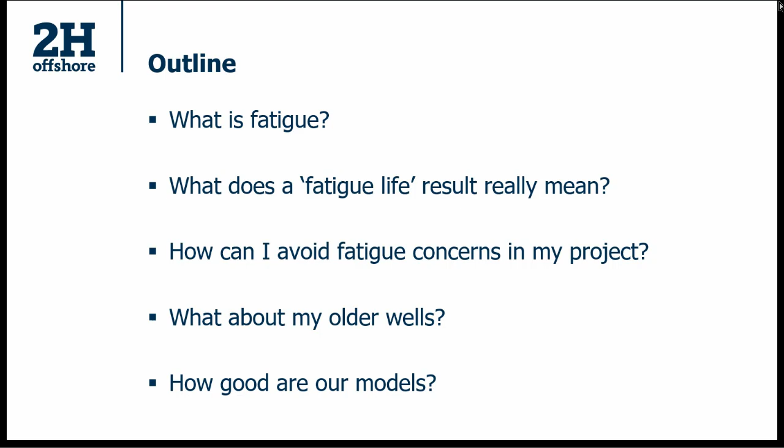And then finally, a question that we often get is, how good are your models? How close to reality does your analysis actually get?

So starting off then, what is fatigue? Probably the classic example of this is an experiment that you might have done with your kids during lockdown, or one that you did back at school, where you take a paper clip and bend it backwards and forwards until it snaps. What you're doing to that paper clip is exposing it to cyclic loading. Now, you tend to bend it quite significantly in the paperclip example, but you don't have to get a fatigue issue. Often for subsea wellheads, we're operating entirely within the elastic regime.

But there are really 3 different phases to fatigue. First of all, the initiation phase, which is where you bend it enough, at a certain threshold, to initiate a crack somewhere on the surface of the material. Then, as you continue to load it, you propagate that crack through the thickness until it reaches a threshold size where the stress intensity at the crack tip is sufficient to overcome the toughness of the material, and you end up with a fast fracture, a brittle failure.

You see on the picture to the left-hand side here, where you've got the initiation site down at the bottom of the sample, the smooth surface associated with the propagation of the crack to that threshold, and then the rough surface associated with the fast fracture and the brittle failure.

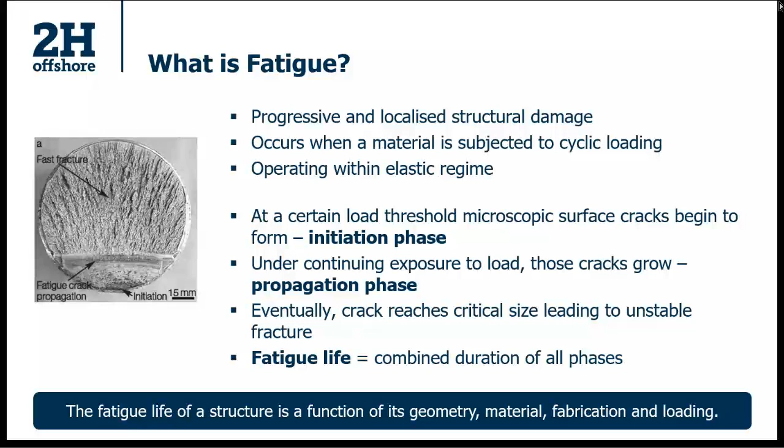But fatigue life really is the combined duration of the material and the loading in all of those phases. For any structure, it's a function of the structure's geometry, its material, the fabrication techniques used to make it, and the loading that it is subjected to, and we'll pick up on each of these themes as we go

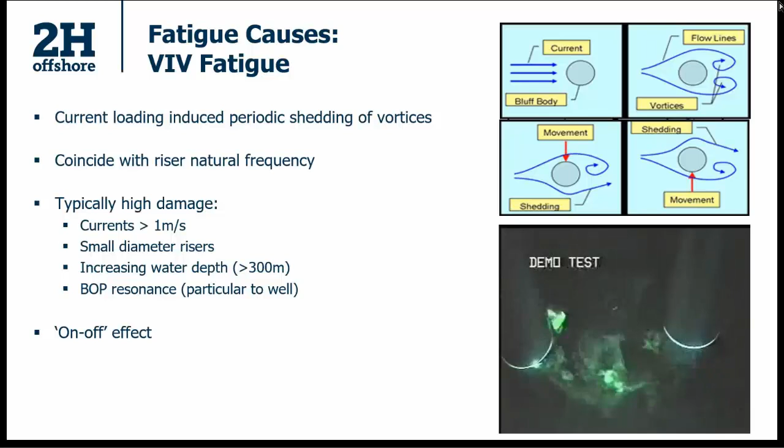through the presentation. In the subsea wellhead world, there are really two fatigue mechanisms that we worry about, environmentally driven. The first one is current-driven fatigue, which is this vortex-induced vibration, or VIV fatigue, and the other one is wave-induced fatigue that I'll talk about on the next slide.

For VIV, when you place a cylindrical body into a current flow, you'll tend to get vortices shed on the leeward side of that pipe, and you sort of see that in the diagram up towards the top left of the slide. Those vortices tend to be shed from one side of the pipe and then the other in an alternating manner. That creates a pressure wave that moves the pipe backwards and forwards and then causes your cyclic stresses and your

fatigue loading. Now that's not too much of a problem typically until the frequency with which those vortices are being shed lines up with the natural frequency of the riser pipe, and then you get resonance occurring. That's when your motions become amplified and so do your damage rates.

So typically for VIV, we tend to be more worried about it where we have faster currents, and it seems obvious. About a 1 meter per second, 2 knot threshold is key for that. Smaller diameter risers that are easier to excite, and also for deeper wells. So increasing water depth, greater than about 300 meters or so is the threshold.

And the deeper water is more of a problem because we have a greater length of riser that's exposed to the current. We have more region over which power can be driven into the system through this excitation effect.

But also we get high damage where in the wellhead, where the riser frequency tends to line up with the BOP frequency. Because if that resonant effect then goes on to excite the subsea equipment, whatever's sitting on top of the wellhead, then you'll get significant damage in your wellhead equipment.

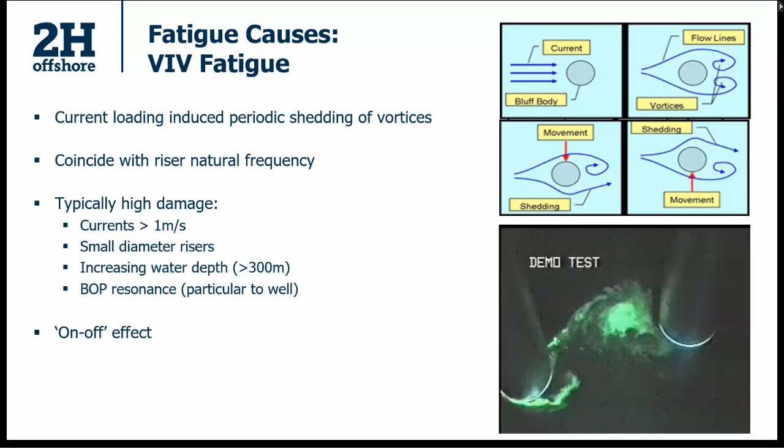But the key takeaway is that VIV is an on-off effect. If you break that resonance behavior, then your fatigue damage rates will drop way off. That's not true with wave fatigue, which is constantly being accumulated at some rate or other.

You've got the wave action on the vessel, on the sea surface, moving that around, and some of those motions get transferred down through the riser. But then you've also got the direct action of the wave on the riser itself as well, through drag loading.

So the opposite of VIV here is that we're more concerned about wave fatigue in shallow water depth, so below that kind of 300 meter threshold. And the reason for that is that the wave is occurring at the top of the system, and the longer you make your riser, the smaller the percentage of it that's being excited by the wave, and the more the percentage of it that's helping to damp out those motions before they get transferred down to the wellhead.

We're also more worried about wave fatigue for the most commonly occurring waves. That kind of makes sense. But also those waves are around about the 5 to 7 peak period second regime, which is where we start to get into that resonance behavior in these kind of water depths as well.

Again, both resonance of the riser, but also the BOP and the subsea equipment. And as I said, constantly being accumulated. Your wave height will rise and fall, as will your damage rate, but you'll always be accumulating something.

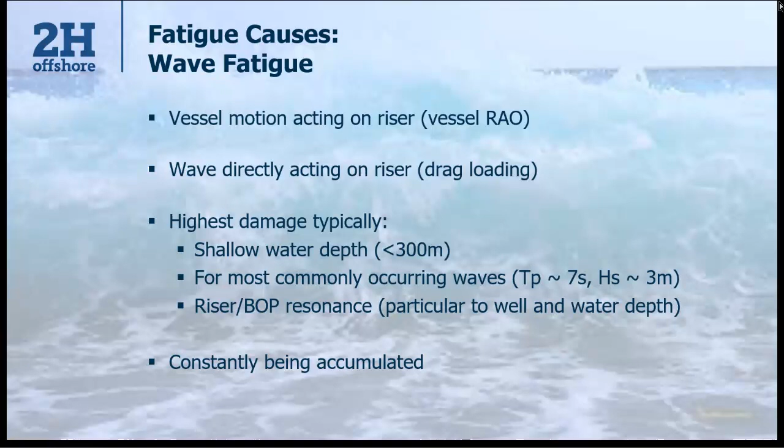But for both mechanisms, the technique that we use to assess them is pretty similar, and we call it the SN fatigue assessment, where S is stress and N is number of cycles. I've laid out 7 different steps to that process on this slide, but really the first 2 are done for us, and we take those from the design codes.

This is where people have tested samples of different materials, different fabrication techniques, different welds, etc. They've tested them at different stress levels and seen how many cycles of those stresses it would take to fail the sample, and that gives us our S stress, N number of cycles relationship.

For any given project, we usually start at step 3, which is generating our stress time traces for the loads we expect in our system during the service life - that's the global analysis step. After we have those stress time traces, we have to do something with them - that's the remainder of the steps, what we call post-processing: quantifying the number of stress cycles of different magnitude that exist in that time trace, then comparing those numbers of cycles to the number of allowable cycles that we extract from the SN curve.

Finally, we add up all those ratios to get our damage, and the last step, step 7, is applying a safety factor to account for the variability. That's where we tend to start losing people in terms of the conservatism that's inherent in the assessment. I'll go through that in some detail in a bit.

But the approach itself has been around a very long time now. It's well recognized in the industry, and it takes different pieces from each of these design codes that I've put down here and some others. These will pop up as we go through the rest of the presentation.

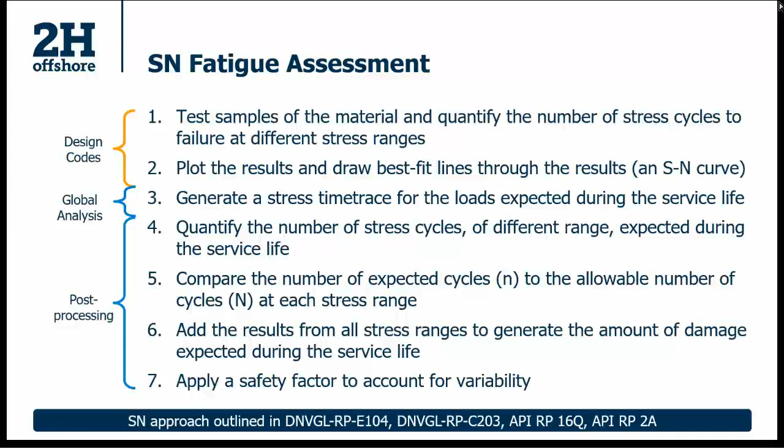As I said, we start on any given project with step 3, which is global modeling. We call it global modeling because we're doing exactly that - we're modeling the whole system in one go.

We typically start at a point that's about 50 meters or so below the mudline. That's deep enough for all the forces and bending moments and everything exciting to have dissipated in the soil above that point. Then we model the conductor up to the wellhead.

We have the subsea equipment, the BOP stack, the LMRP, etc. Go up through the riser joints, telescopic joint, up to the drill floor of the vessel, whatever's attached to our well.

That allows us to have all of the behavior connected together in one model, and we can expose the whole system to the environmental loads. So we get the action of the wave on the vessel, as well as the direct action of the wave on the riser, for instance, all captured in one model, and we can extract the structural response of each individual component in that system, again from a single model.

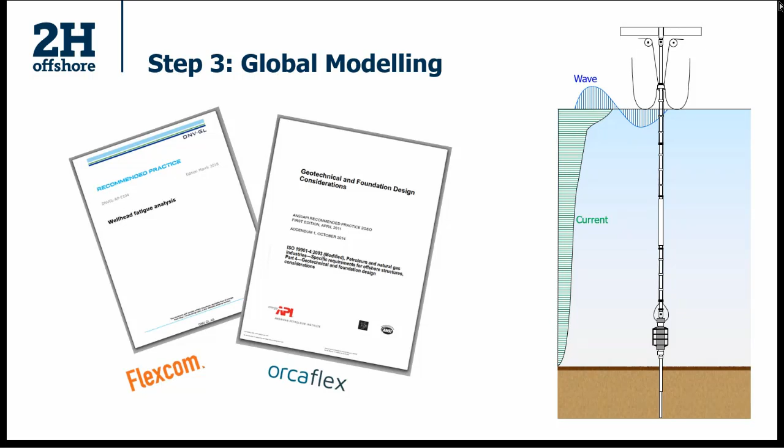It's essential to use appropriate information, and that's important. By that I mean site-specific, so it belongs to the location where you're actually going to be performing the operations, but also appropriate in terms of the time of year and the season that you're going to be doing those operations in. So if you're going to be doing them in the summer, then you want to take the benefit of having summer weather, so the diagram should represent that.

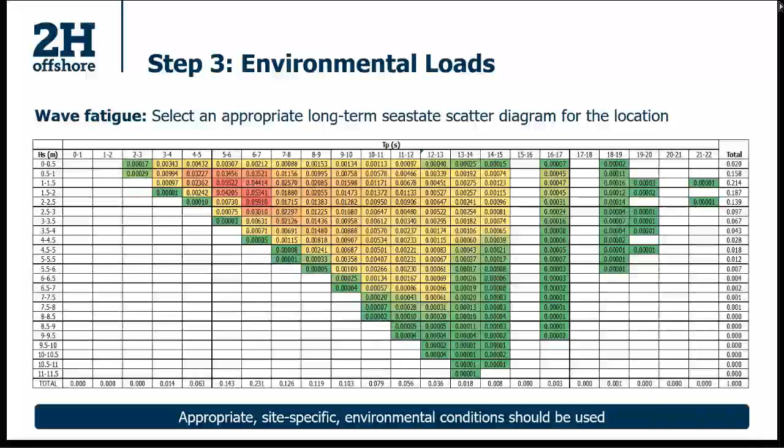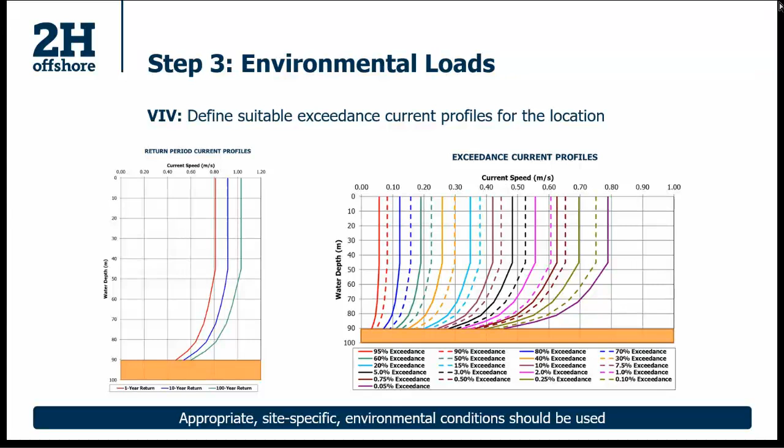So once we've built the model, we've loaded it with the environmental conditions, we've agreed they're appropriate. Now we need to convert the outputs into our stress cycles. And there's different steps to that.

The first one is to extract time traces of bending moment and tension at each node of interest. We can extract them from any point of the system because we're using this global modeling approach.

We then convert those outputs to stress time traces, considering the geometry of each individual component and beam theory, and also the appropriate stress concentration factors for each component. By that I mean the ratio between the peak stress at a location that might be more heavily stressed than average, and the average stress across the wall thickness. This applies for things like connectors, where you might have a peak stress in a thread, for example, relative to the average stress across the main part of the wall.

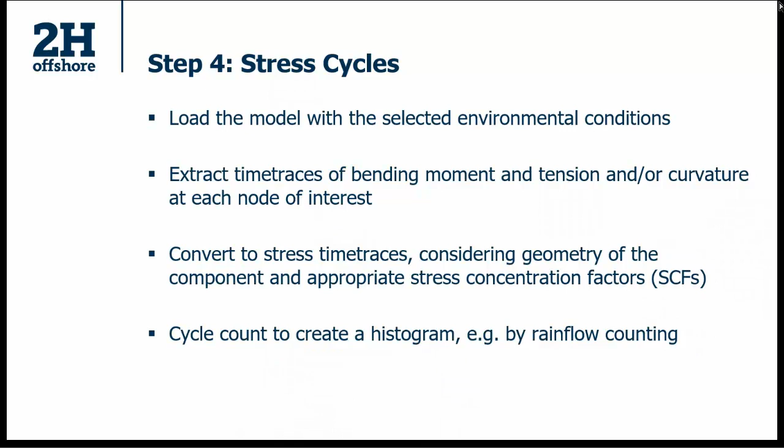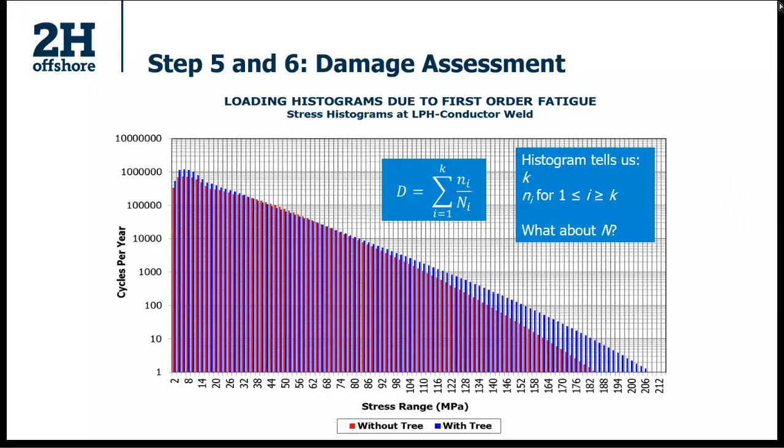And that information comes from the SN curve. The SN curves, I said that they come from design codes, but it's worth spending a moment or two just examining how they're actually formed.

The way that they are formed is that you take the sample of the material that you're interested in, whether it be a base metal or a welded detail, or whatever it is, and you expose that sample to a bending moment or a known stress range. You bend it backwards and forwards, just like the paperclip that I started with, until that sample breaks.

You count the number of cycles that it took to break that sample, and you mark it on your plot. Do that again with a second sample and a third, until you've got enough information to understand the distribution of failure at that particular stress cycle. Then you increase the stress on the component, take another sample, repeat the test and get a value of n, another sample, and again until you've got enough information to build up that distribution.

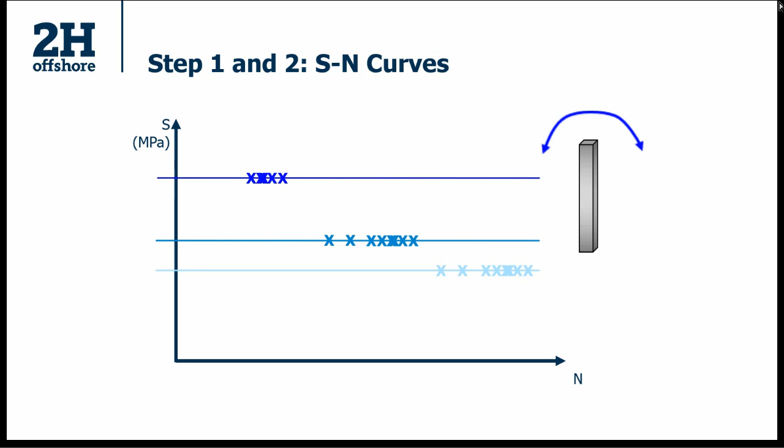And you keep doing that at enough different stress levels until you've got sufficient information to draw a best fit mean curve across the entire SN domain. Then the final step to convert that to a design tool is to pick a design curve which is usually placed 2 standard deviations below the mean, or around about a failure probability rate of 2.3%, 23 samples-ish in 1,000 samples that you've been testing.

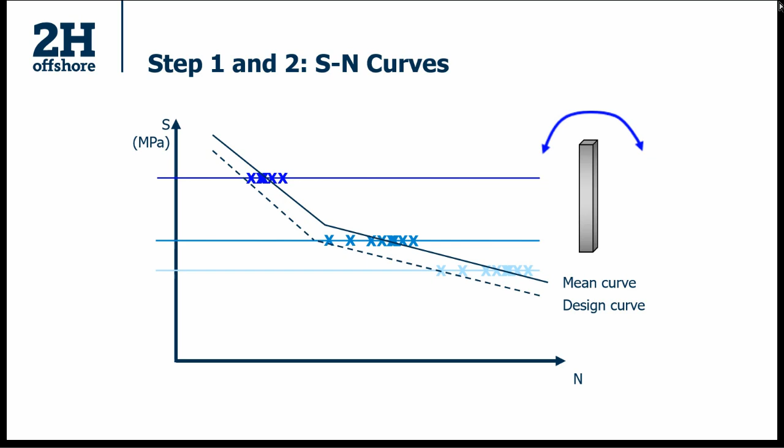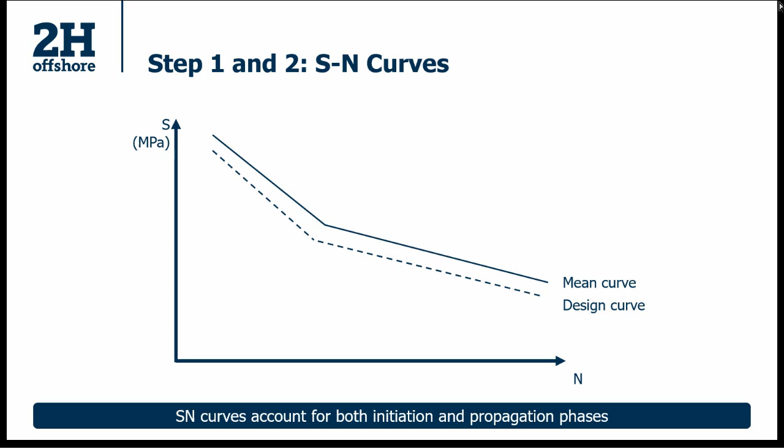One of the key things about SN curves is that because you're taking the samples through to failure, they account for both initiation and propagation phases of fatigue life. You'll have different ratios of those phases for different types of sample, but you're encapsulating everything in one curve.

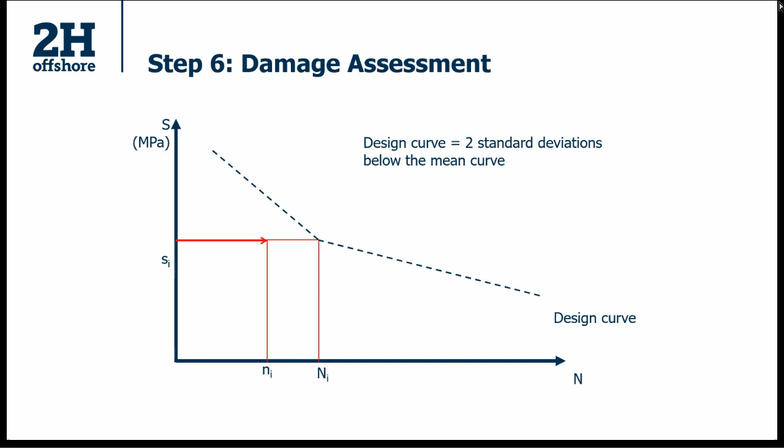So we have our design curve, which is 2 standard deviations below the mean. From our histogram, we extract for each stress range level, S, the number of cycles that we expect, little n, and we also calculate from the SN curve the number of allowable cycles at that same stress range, which is our big N. Then we take each of those little n over big N ratios and add them all up to calculate our fatigue damage.

And for subsea structures, the SN curves are available in DNVGL-RP-C203, and that's usually our primary reference for this information.

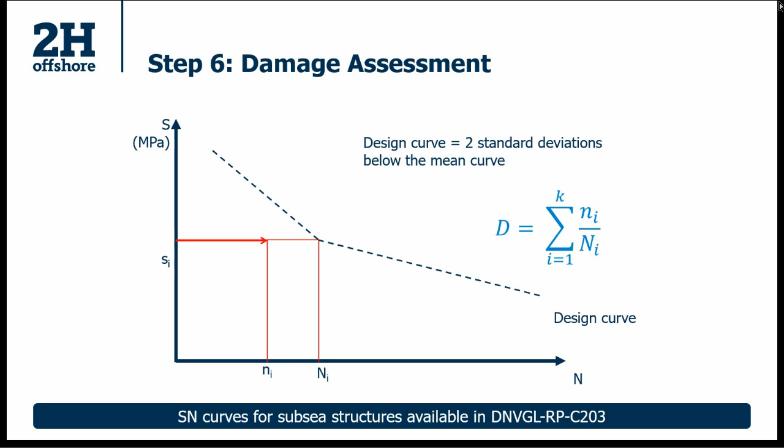Then the final step in this process, step 7, is the application of that safety factor. And really there are 3 main reasons for doing this.

First of all, to account for variability in the loading. For predictive analysis, where you're planning a forward-looking operation, you have to use an assumption about your environmental data, an average essentially. You might narrow that average down to summer weather or winter weather, but the actual summer you go out there to do it might be more benign or more onerous than the average conditions. So there's going to be some variability there.

There's also some uncertainties in the design data. Perhaps your real-life conductor stick-up is slightly different from your plan and design, for example. So you need to account for that as well.

But probably the most important of these 3 aspects is to apply a safety factor to ensure the probability of failure associated with the fatigue life result is appropriate for the activity. Because we're dealing with drilling hydrocarbon wells, where we've got environmental risk, human risk, and everything else associated with that, normally those activities are classed as high safety class in DNVGL's ST-F201 world, and the acceptable failure probability associated with that safety class is of the order of 10 to the minus 5. They say that if you apply a factor of safety of 10, you should be operating somewhere down at that level in terms of failure probabilities.

If you have a lower safety class operation, you can accept a higher failure probability, up to 10 to the minus 3, for example, and then you can apply a lower factor of safety, like 3.

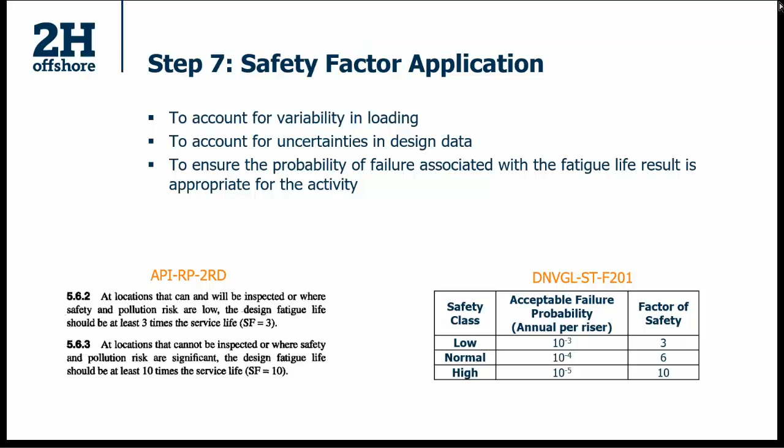Now in API's world, they have a slightly different logic, but they end up in a similar place. What they do is say that if you can and you are actually going to inspect your components during the service life, then you can use a fatigue factor of safety of 3. But if you can't or won't inspect during the service life, then you must use 10. So the numbers are the same, but the logic is slightly different.

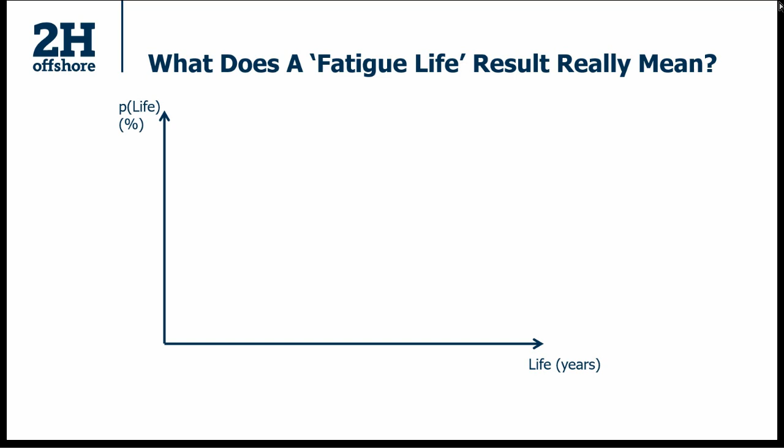So we do all that and we get a fatigue life result out. But what does that fatigue life result actually mean? On this plot, I've got increasing life along the x-axis, and probability of failure at that life up the y-axis. The first thing we can mark on here is a known variable, our service life - that's the time the drilling riser will actually be connected to the wellhead.

Now we're then going to pick an appropriate factor of safety - let's say it's that 10. And we're going to multiply our service life by that factor of safety to get our design life. The design life is essentially the target for our fatigue analysis. So before we apply a safety factor, what raw number do we need to get out of the fatigue assessment to actually meet our fatigue requirement?

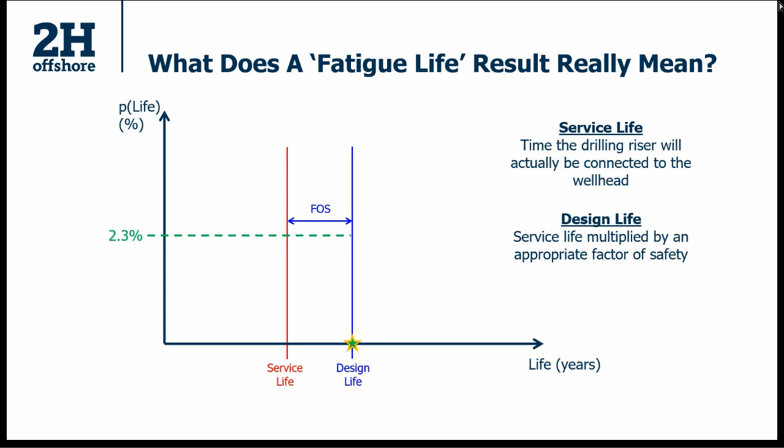That's the design life number here. So let's assume we do that and get a fatigue result from the analysis that's exactly equal to our design life. What that really means is that at that point in time, we've got around a 2.3% chance of failure. Now there's a massive assumption that goes into this, which is that the loading and the analysis is a perfect representation of reality, and that 2.3% just links back to the selection of the design curve from the SN world, from the SN testing, and the fact that we're 2 standard deviations below the mean.

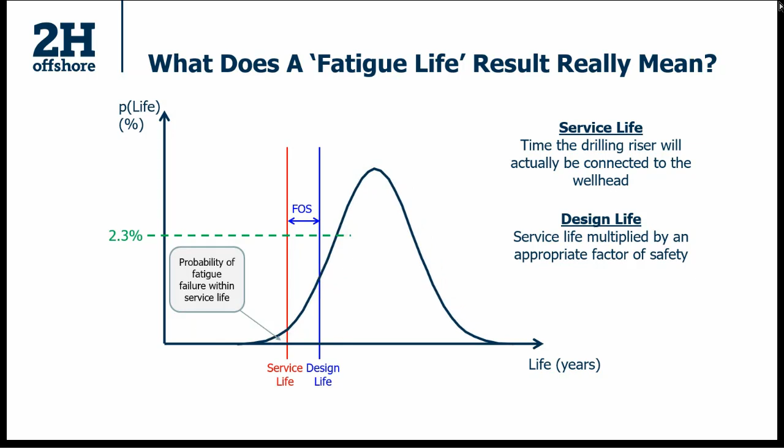As I said before, there's a lot of variability around this result, so really that point just represents one point on a big distribution. And by introducing that safety factor, what we're doing is controlling the amount of that curve that's below, or a time period that's shorter than our service life. The area under that curve to the left of the service life is the probability of fatigue failure within the service life. So if we've picked our factor of safety correctly and met our design fatigue life target, then that is an acceptable area. If you pick a lower factor of safety, what you're essentially doing is accepting a shift of that curve to the left and a greater probability of fatigue failure within the service life.

So the fatigue life then is the time with the drilling riser connected before the allowable probability of a fatigue failure is exceeded, and that's kind of the definition that I use.

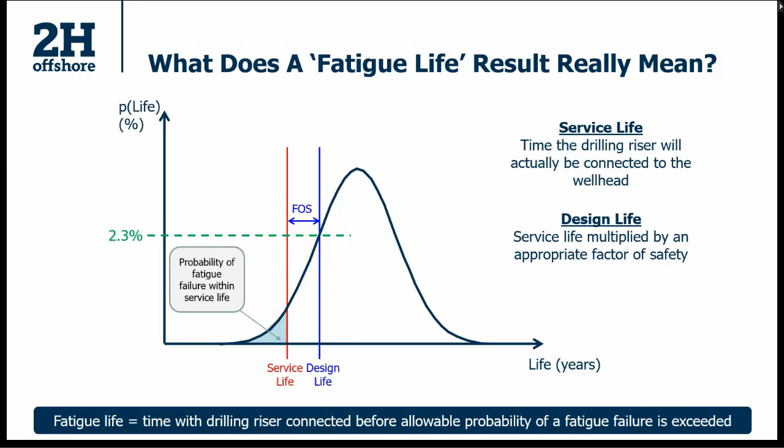Alright, so that's focused mostly on analysis so far. Let's shift gears a little bit and look at design and avoiding fatigue issues.

For new drill wells, fatigue issues can generally be designed out of the project. That might be through picking equipment of a sensible or suitable size, like your conductor sizing or your surface casing sizing, or it might be picking fatigue-resistant equipment, like certain connector types or wellheads, or it might be placing that equipment somewhere it's not exposed to peak loading, reducing fatigue damage rates.

The final thing you can do here is pick a vessel with favorable dynamics, one that's not going to exacerbate any resonant effect, and that will have its peak motions in a period outside the main wave occurrences, for example.

Now, for intervention operations on older wells, you can pick a vessel again, but apart from that, there's not really a lot you can do with the design because the well's already in the ground.

So here, this is probably where you're going to need refined analytical approaches. It may be where you need to look at risk assessing reduced safety factors, particularly for abandonment operations or late life operations. Or you may need other mitigation strategies such as structural monitoring or structural reinforcement. We've got some slides on those towards the end.

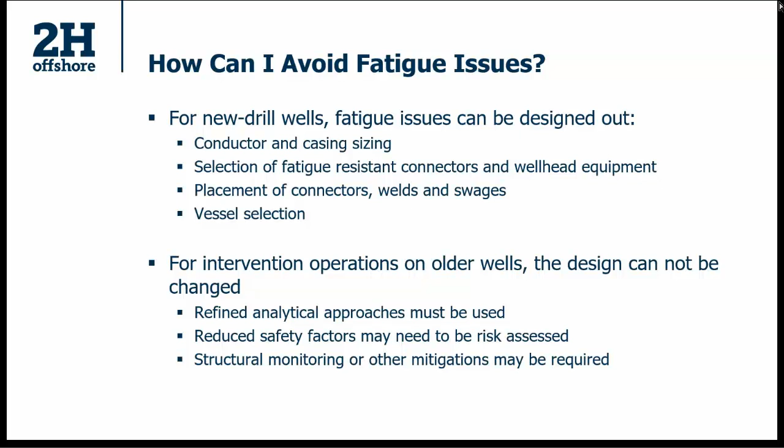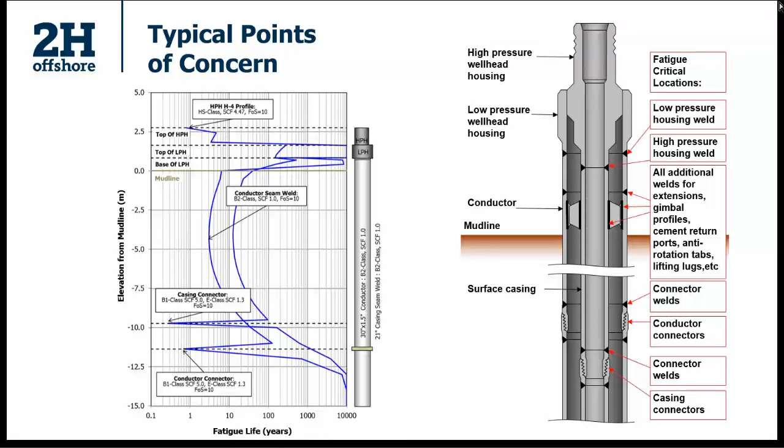Those spikes are caused by something interesting in the fatigue world: either a geometric feature, such as a thread, gouge or notch associated with the connector that gives a high SCF because of a stress raiser, or a weld that, through the manufacturing process, has a higher probability of an existing flaw compared to the base metal. The first increases our stresses through the SCF. The second, the defect in the weld, reduces the number of cycles we can have because we've already got a defect of a certain size in the material, reducing the SN performance.

Some of the things you can do in design to improve fatigue resistance, we'll go through in the next few slides. This first one is looking at conductor size. For this particular example, it's a certain configuration in a certain location, so there is some variability.

We're comparing the fatigue response at two different welds in the system across four different load cases for different conductor sizes. We start with a 30-inch by 1.5 inch wall thickness conductor, load case 1, go up to 36-inch by 1.5 inch, load case 2, then continue to increase wall thickness and OD for load cases 3 and 4.

You'll see that increasing from 30-inch to 36-inch gives us about a 5 times improvement in our fatigue result, and we keep improving as we go bigger, although those improvements tend to level off. So that increase from 30 to 36 is the key one here, and that's one that many people use in the design of fatigue critical wells.

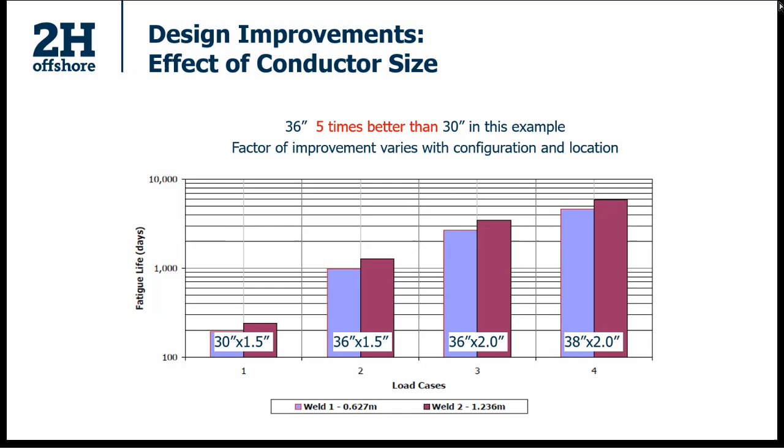Conductor stick-up is another one. As you increase your conductor stick-up, the height of your wellhead above the point where it's supported by the soil, you're essentially increasing the lever arm effect from your BOP and LMRP stack sitting on your well. Just like a flagpole, the longer you make it, the greater bending moment you'll have occurring in the wellhead at the soil itself.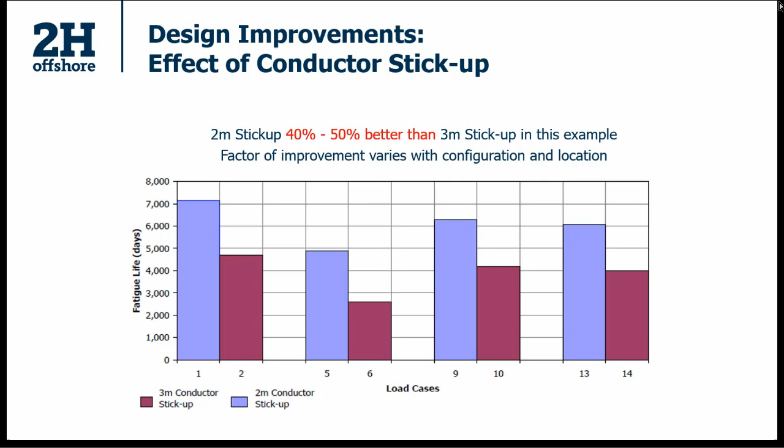Something else you can do is look at the hardware that you're using. For the wellhead, you'll generally pick it for its strength rating and for its internal pressure rating. But you may want to consider whether or not it has a rigid lockdown mechanism associated with it - a mechanism that keeps the high pressure housing in contact with the low pressure housing at all levels of load.

If you achieve that, then you're making sure that the bending moment you're putting into the wellhead is being resisted by both the conductor string and the surface casing string at all times. There's no lift-off effect, if you like.

But as well as the performance of the housing, you want to also make sure that the weld joining that housing to the adjacent pipe, and the design of the weld prep at the base of the housing, is sufficient to give you suitable amounts of fatigue resistance. There's no point having a fatigue resistant wellhead if the weld attaching it to the pipe doesn't have the same level of fatigue resistance. It's a similar story for the couplings.

And then the other thing you can do with any conductor type is extend the length of the extension joint below the wellhead. By doing that, you're going to push the connectors deeper into the soil and push them below the area of peak bending moment, as we've seen on the couple of fatigue life plots so far.

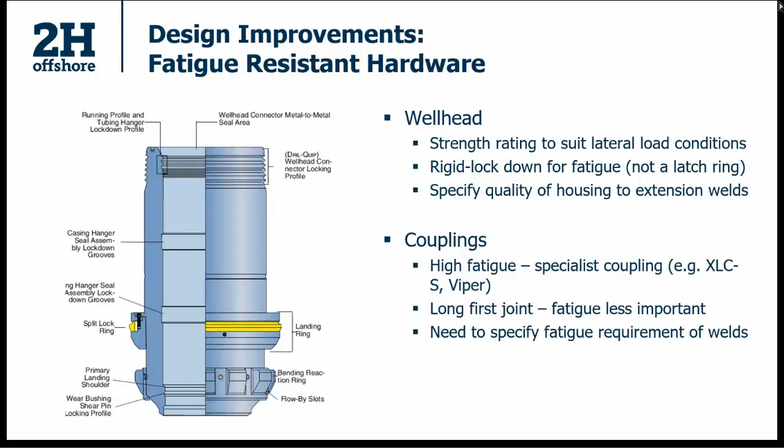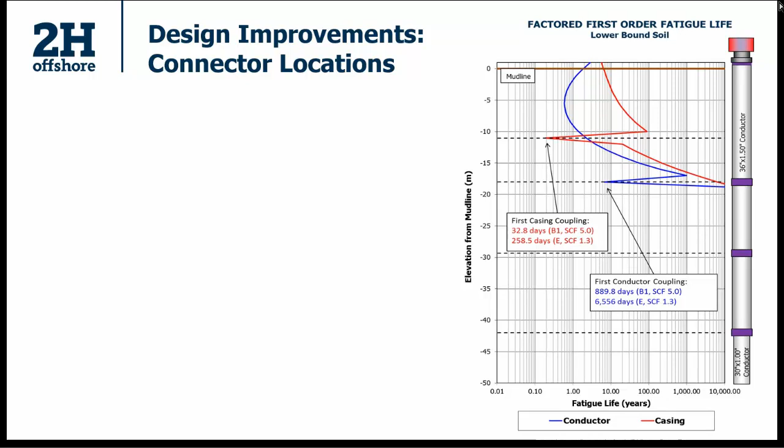If you do a mental exercise and move it up to where that red spike is, about 11 meters, which is where a traditional 40-foot joint would end, the tip of that blue spike would be off the chart to the left. So our fatigue life would be below the 0.01 year level, which obviously wouldn't be sufficient for our operation. This shows how critical the location of the connector can be in terms of your fatigue performance.

Finally, on design decisions, vessel selection. Now, I've said there's a recent trend to increase BOP size, but really it's been going on for quite a while now - partly driven by a push towards deeper water, partly driven by a push towards drilling wells at higher pressure.

But also that post-Macondo effect, almost a decade ago now, where additional rams started to be added to BOP stacks for well control reasons. That's good for safety, but not so good in terms of the loads we're putting into our wellheads. As you make that stack bigger and heavier, you're going to be increasing the load on the wellhead.

And then the other slightly more subtle effect is that as you increase its size, you're changing its resonance frequency and pushing it up to slightly higher periods. That's going to be more likely in the region of peak wave occurrences that we talked about before in those scatter diagrams. So there's a resonant effect as well as an increased load effect on the wellhead.

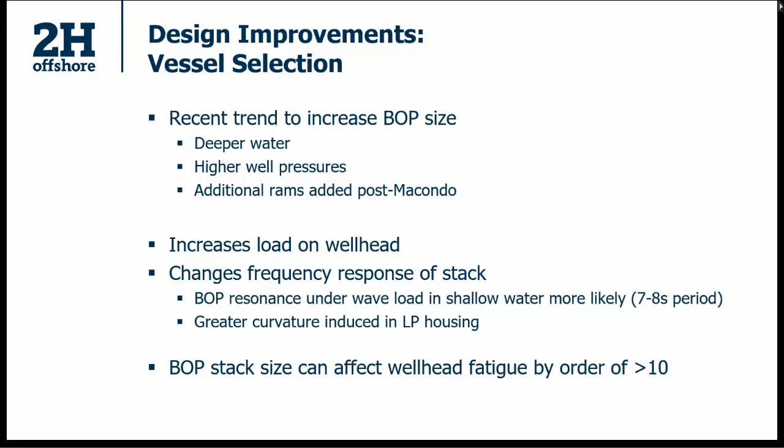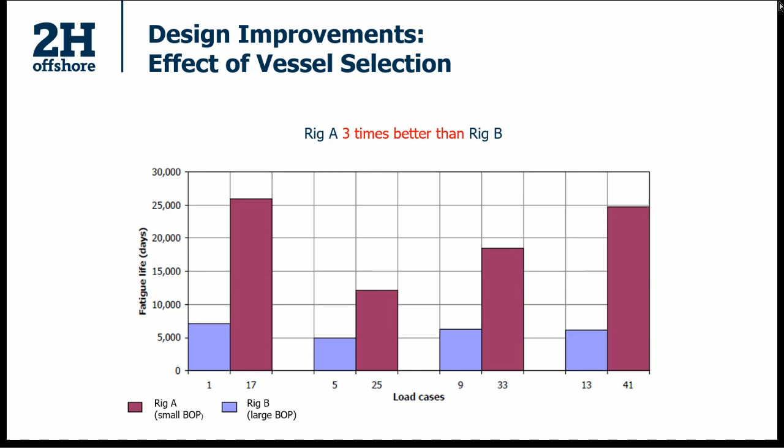So that's for new drill wells where you can do a lot in the design, but what about older wells where the design is essentially fixed?

You can still do something with the vessel, but what's complicating matters is that depending on the age of the well, the inherent fatigue resistance of the equipment used in the original design may be quite low compared to modern standards, because it was probably going to be drilled with a smaller stack, for instance.

The other complication is that because you're looking at this well halfway through its life, it's already undergone some drilling operations. It's probably been drilled and completed, perhaps worked over and intervened on the rest of the time, and so some of its fatigue capacity has already been used up. What we need to do first is understand how much of that capacity has been used up, so we know how much we have left for our proposed planned operations.

Because of those complications, simplistic assessments are unlikely to yield workable results in a lot of cases. So you might need to do some historical data dive to see what information you've got to improve the analysis. That might be looking at things like the actual weather experienced during previous operations, either from recorded measurements or from hindcast modeling.

Looking at wave directionality and the vessel heading, how that lined up during those old operations. Looking at operational information, things like riser tension and mud weight that were actually used during those old operations.

And anything that you've been able to do in terms of calibrating the model, either through monitoring data, that I'll talk about shortly, or by looking at data from offset wells that have gone through a similar process to improve the accuracy of the soil model and improve the analysis that way.

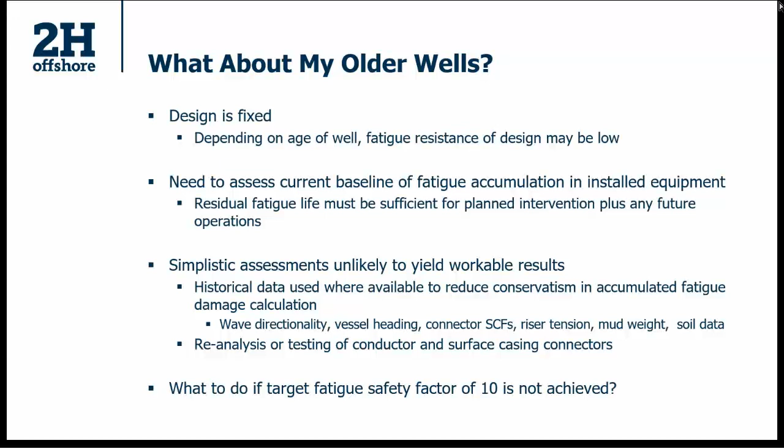But after doing all that, there's still a significant possibility that your target fatigue safety factor of 10 may not be achieved. And in those cases, that's where you need to look at other mitigation strategies.

Other things you can do: smaller diameter risers and stacks. Can you get away with using a smaller BOP stack, for instance, particularly for abandonment operations where you have a very restricted amount of fatigue capacity left? Or can you use a fixed vessel rather than a floating one if your water depth is shallow enough?

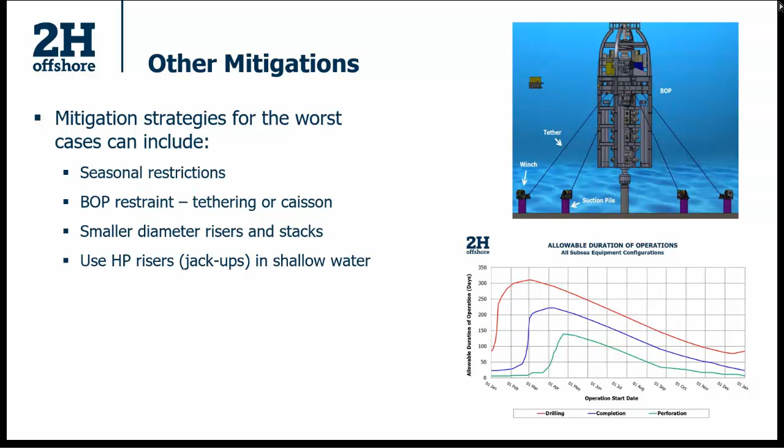You can use any sort of technology to anchor one end of the tether to the seabed - that can be clump weights, embedded anchors, suction piles, whatever it is. Then you have tethers between those anchors and the BOP itself, restricting the motion of the BOP. If you engineer that correctly, then you can get one or two orders of magnitude improvement in your fatigue damage rates by putting one of these systems in place.

And then the other mitigation strategy available to you is the use of structural monitoring, again useful where required safety margins are not achieved. It's quite challenging to measure motions of the wellhead system itself directly, for access reasons, and also because the wellhead doesn't actually tend to move that much itself.

So what we tend to do is put loggers on the BOP, on the subsea equipment, measure motions there, and then convert those motions into fatigue damage rates in the components we're interested in, through transfer functions that we've extracted from the analysis.

That allows us to derive in-service fatigue damage rates, and if we're recording and monitoring the environmental data at the same time, then we can force the analysis model with that environmental data and extract fatigue damage rates for the same conditions and compare those to the measurements.

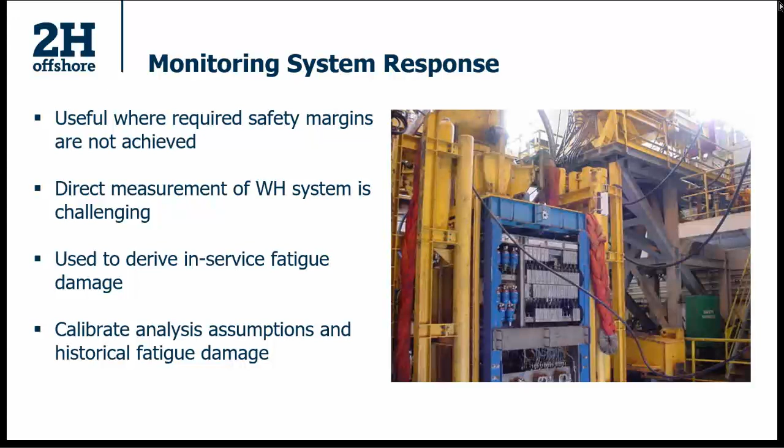Then we can calibrate our model and improve our assessment of both historical and future fatigue damage. So that leads me nicely on to the final question, which is how good are your models?

This slide shows an example of using structural monitoring to answer that question. We have cumulative fatigue damage on the y-axis and the timeline of the event along the x-axis. The blue line is the significant wave height trace throughout the operation. The green and red lines are our cumulative fatigue damage lines. The red one is damage calculated from the measured motions from a structural monitoring system, and the green one is

fatigue damage calculated from the analysis for that same blue environmental conditions we actually saw during the operation. You can see the lines do deviate, but in terms of a ratio, they stay fairly constant between them, and that ratio is about 1.5 on fatigue damage. That's fairly typical - with good calibration of the model, we can usually get within a factor of 1.5 to 2, which equates to a factor on bending moment of between 1.1 and 1.2, so pretty close to reality.

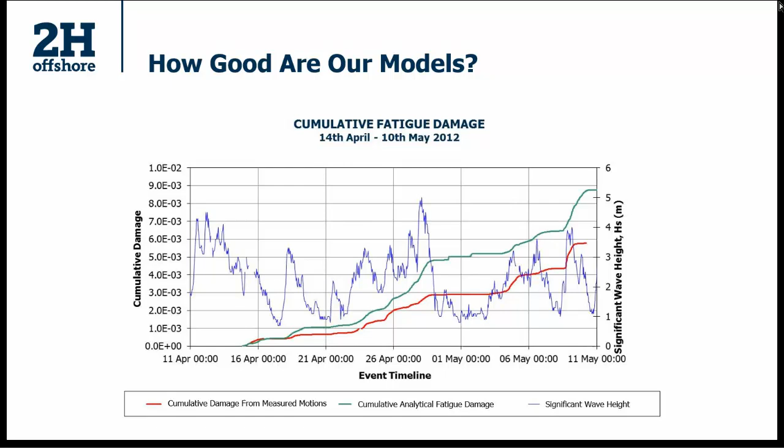We do that quite often on a project-by-project basis. But my final slide before I wrap up summarizes some very recent JIP work we've done to look at such calibration activities across a range of different data sets from different basins, from the North Sea and the Gulf of Mexico, in water depths ranging from about 100 meters to about 1900 meters or so.

We had 9 participants for the first phase of this work, and we took measurements from 10 different drilling campaigns and reanalyzed them using consistent, up-to-date analysis techniques. The results are summarized in the 2 plots to the left. We have wave fatigue results on the top plot, and VIV fatigue results on the bottom plot.

They're shown as scatter, so each dot is the comparison of a measured fatigue event versus the analytical prediction for that same event. Any dot above the grey line going from bottom left to top right is a conservative dot - the analysis says we should have more fatigue damage than we actually recorded. Any dot below that line is under-conservative - we got more fatigue in real life than from the analysis model. You can see the majority of the dots in both cases are on the conservative side, so that's pleasing.

But there are some on the under-conservative side. The other notable thing is there's a lot more scatter in the VIV results than in the wave fatigue results. If you average all of those dots, we get these factors of conservatism, but obviously they don't apply in all cases - some projects were closer to reality, around that 1.5 to 2 factor, than others. There are some outliers driving these numbers up.

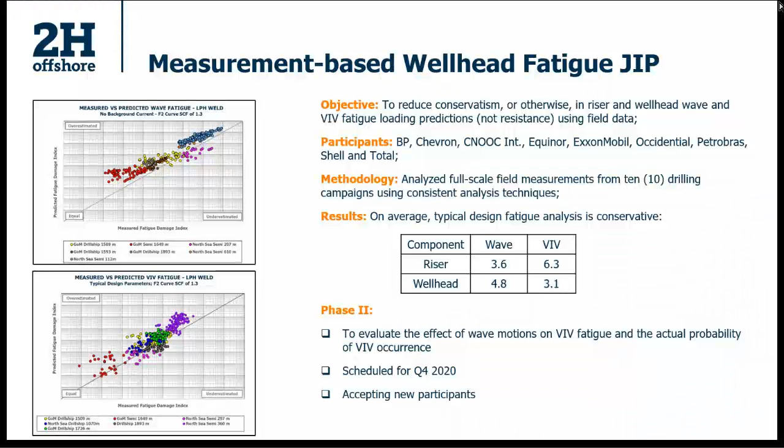So that's almost it from me. Just to wrap up, I posed 5 questions at the start, and hopefully I've answered them. Firstly, what is fatigue? It's progressive and localized structural damage that occurs when a material is subjected to cyclic loading, and it's really that cyclic loading bit that's key for a fatigue mechanism.

What does a fatigue life result really mean? It's the time with the drilling riser connected before the chance of a fatigue failure is higher than the allowable probability. For drilling and completion operations, we're told we should be operating at probabilities of failure around 10 to the minus 5 or so. For new drill wells, you can generally design fatigue concerns out of your projects.

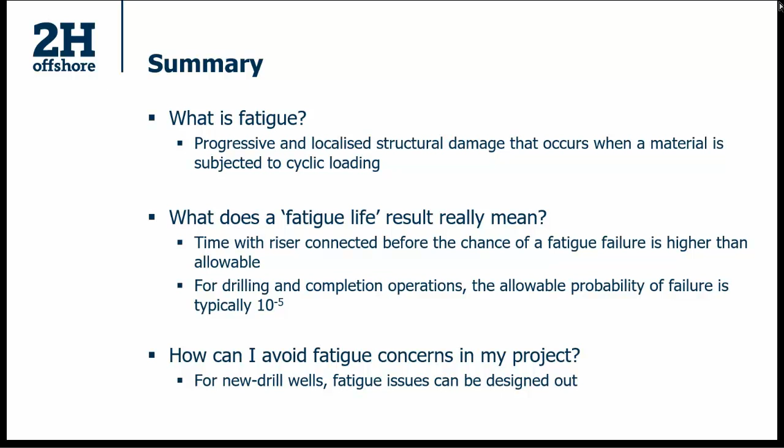But for older wells where you don't have control of design, you're going to have to look at that historical data to see what's available to you to improve the accuracy of the model. You might have to assess using a reduced safety factor, or you might have to look at other mitigation measures like structural monitoring or structural reinforcement.

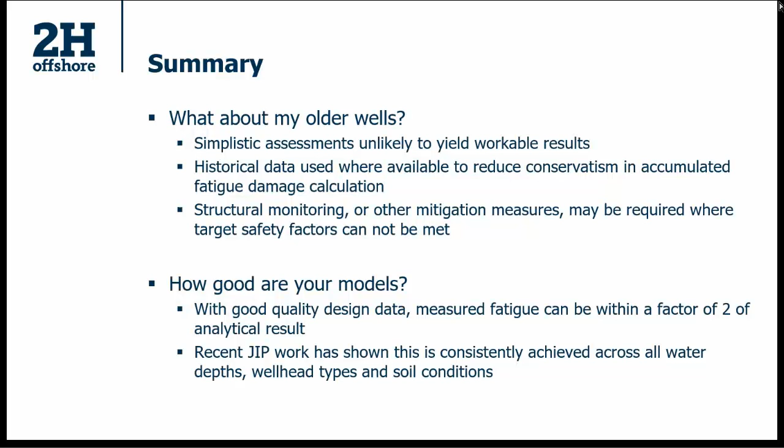And finally, how good are your models? With good quality design data and a calibrated model, measured fatigue can often be within a factor of 1.5 to 2 of the analytical result. Our recent JIP work has shown that can be consistently achieved across all water depths, wellhead types and soil conditions, but there are some outlying cases that will be the focus of the next phase of work.